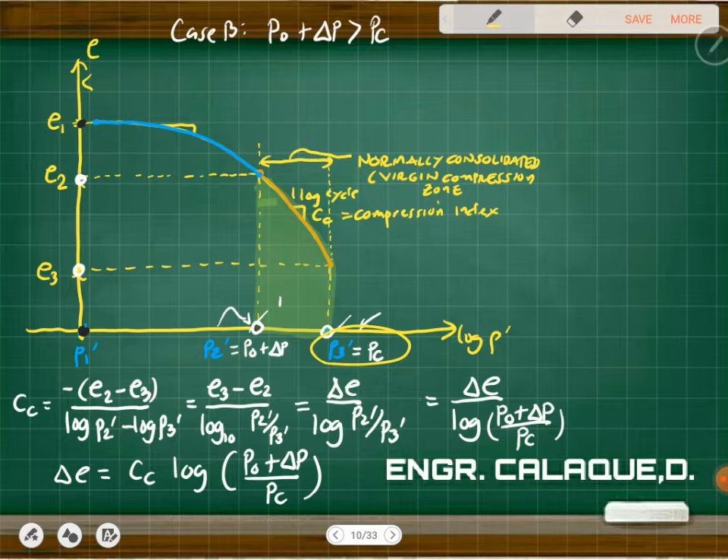So pag normally consolidated, that is just equal 1. Take note, yung logarithm ng 1 is 0, diba? So matatanggal yan for normally consolidated clay. So yung matitira is ito na lang. Pansin mo? Ito din yan. Pero yung naiba is yung PO, ginawang PC, tulad nung pinakita ko sa second na video. Instead na PO, ginamit niya PC, kasi under pa rin siya sa over-consolidated. Hindi siya normally consolidated.

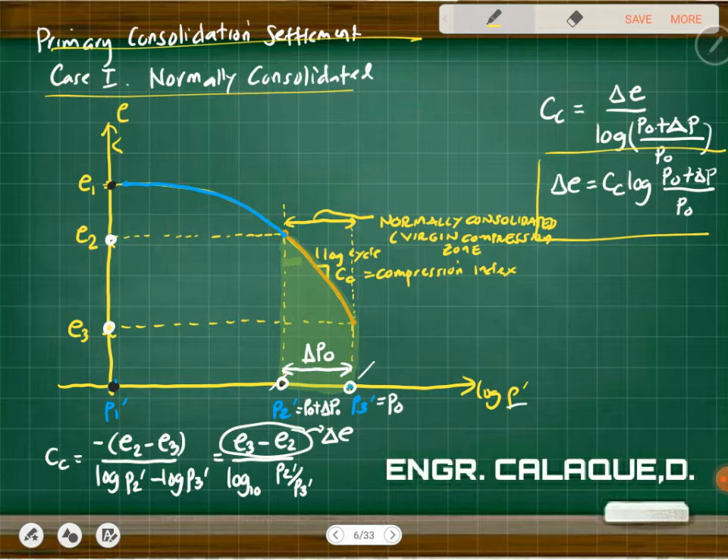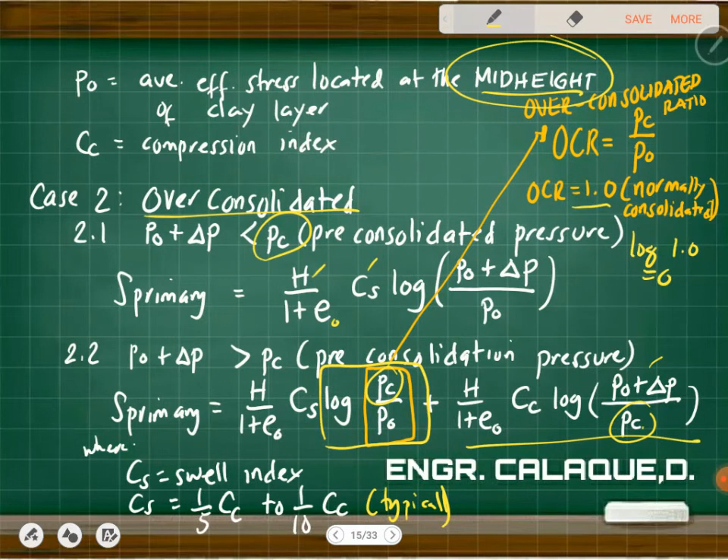So, yung EO naman, that is the in situ void ratio. Yun na, sinabi ko na. Then, yung secondary compression index, this is secondary compression index, yung pangalan nito.

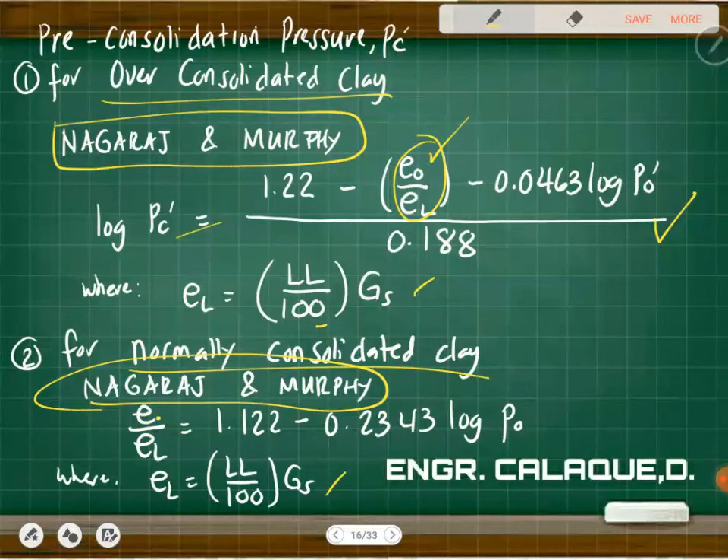So, for Rendon-Herrero, it's 0.141 times specific gravity raised to the power of 1.2, times 1 plus the in situ void ratio over the specific gravity, then that term raised to the power of 2.38. For Nagaraj and Murthy, so many formulas, that is just 0.2343 times the liquid limit all over 100, times the specific gravity. In their formula, this is the LL. That's their formula.

Anyway, there are more, 4 and 5: Park and Koumoto, and Nishida for all clay. If only the in situ void ratio is given, you can use Nishida: 1.15 times e0, the in situ void ratio, minus 0.27. If the in situ porosity is given, you can use the Park and Koumoto formula: the in situ porosity all over 371.747 minus 4.275 n0. There are so many formulas to remember.

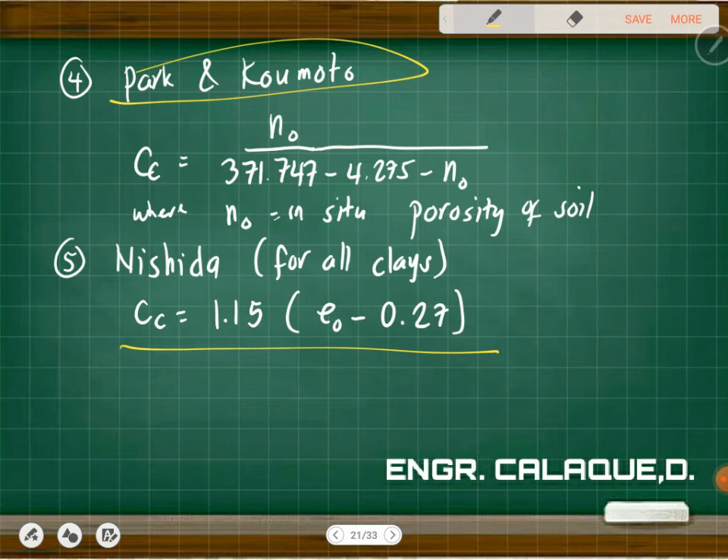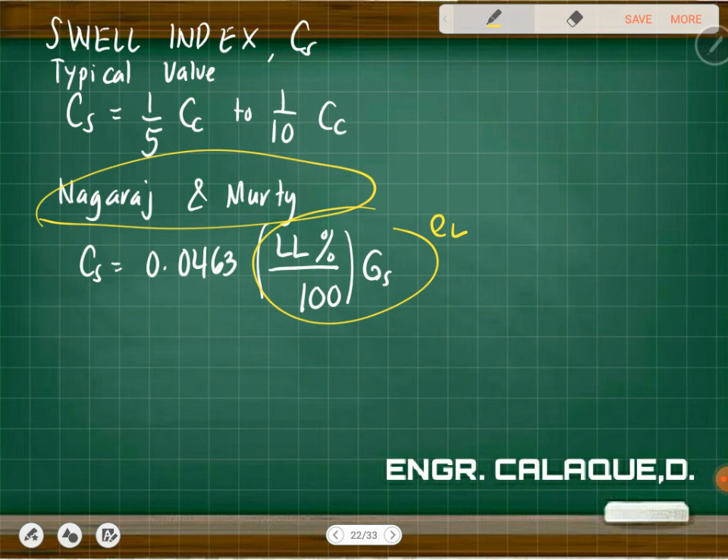Then, we have also the swell index, CS. The typical value is 1/5 of CC to 1/10 of CC. And there are so many formulas; Nagaraj and Murthy are really smart. So we have 0.0463 times the LL, the liquid limit, all over 100, times the specific gravity of the soil. There is also what we call the coefficient of consolidation.